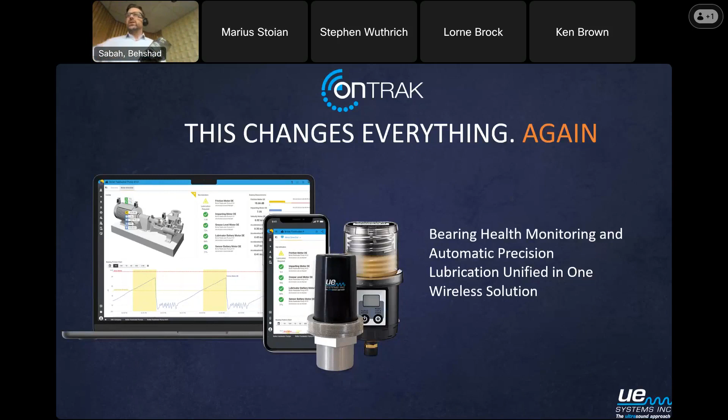So first of all, I always like to start off with a scenario, and I guess my bio was indicative of this, that I've been in this space of a race to detect a problem with an asset or a piece of equipment, and in particular, rotating equipment. So across all industries, everybody has these pieces of equipment, and that's why we're here, that move in a circle, and we need to keep them properly lubricated.

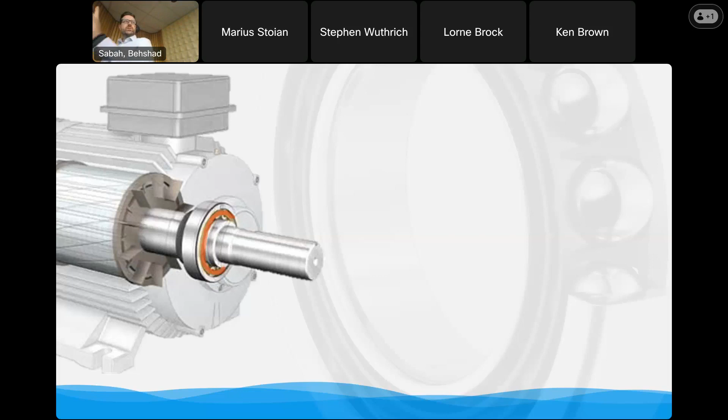And what's happened in the space I'm in around the industrial Internet of Things is it's something I call a race to detect a problem. So what technology can first detect that there's something going wrong with a piece of equipment, which is great. And that's this first scenario here, which is this defect detected.

So essentially, when you look at an alert like this, now I made this alert up, this is in my language, but essentially, as we talk about bearings in particular, there's something wrong with them. Something's already happened by the time technology picks it up.

And if anyone goes back to the late 1960s, there's two gentlemen named Nolan and Heap that started RCM, Reliability Centered Maintenance, and they did a study on the airline industry. And they identified what's called the P to F curve. P is when there's an identifiable physical condition, and F is when there's a functional failure. So that identifiable condition is something that has already gone wrong in a bearing.

The other scenario that we're really working towards, and we believe in that old adage of an ounce of prevention is worth a pound of cure.

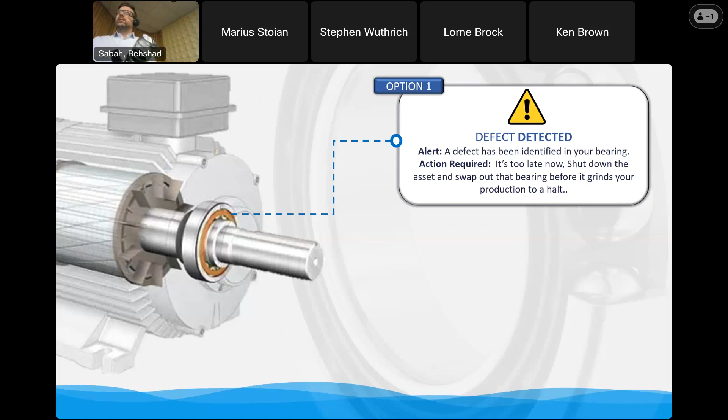There is value in stopping that defect from happening in the first place. So there's really two types of alerts we're trying to focus on here. One is there's a defect detected, but if we take a little bit of the investment we're spending on detecting a failure and put it toward lubrication, I'll get to why lubrication is so important. I know I'm preaching to the choir, but if you have the ability to prevent that failure from happening in the first place, don't you think that would be a better place to put technology? That's what we're going after, and it's a very unique insight we're trying to offer here. In fact, when I ask people, would you rather have option 1 or option 2 for an alert, the right answer is I want both.

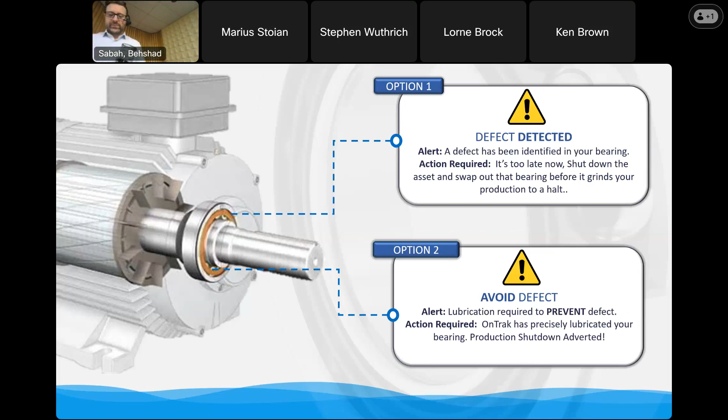So when we go back to that Nolan Heaps curve, and I guess for those in the room, I can't see those online, has anyone had any education around reliability centered maintenance before? This might not be anyone that's in our field, but UE Systems understands we've always been told you cannot have a presentation unless you have a P-F curve in it.

And where ultrasound fits, undeniably - it was actually a study done by NASA looking at bearing defects and the technology that could first detect the first incipient fault within a bearing. Ultrasound, or acoustic emission as it's otherwise known, was the first technology to pick up a defect. Over the years and decades, where it really came into fruition was not only detecting that issue, but moving back before there was an issue to where we could see a problem with lubrication.

So we could literally hear and measure the ultrasound emissions that are leading to that bearing needing lubrication, or of course it failing. This is before - and I'm talking specifically from a bearing aspect point of view - before vibration, before there's a change in temperature, and of course before you can hear, smell, and sometimes even taste it. So when we're looking at ultrasound, we're looking at detecting that failure, but we're also looking at those very, very subtle signs that there's something in that bearing, that bearing needs a little bit of care from us.

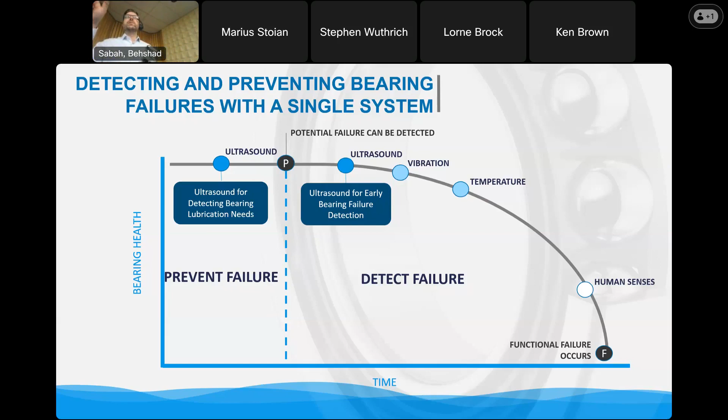I keep on wanting to hit the other button here. This was an SKF study, and I heard you guys talking about going through SKF - it was a great study. Timken and all the bearing manufacturers and third parties have similar studies.

Now it does vary between 60 to 80%, and what I'm talking about here is rolling element bearings, so we're talking about grease lubricated bearings. Up to 80% of premature bearing failures can be traced back to a problem with lubrication. Now the reality is, in the industry I come from, it's all throughout all manufacturing, all industries. It doesn't matter if that's 60% or 80% still.

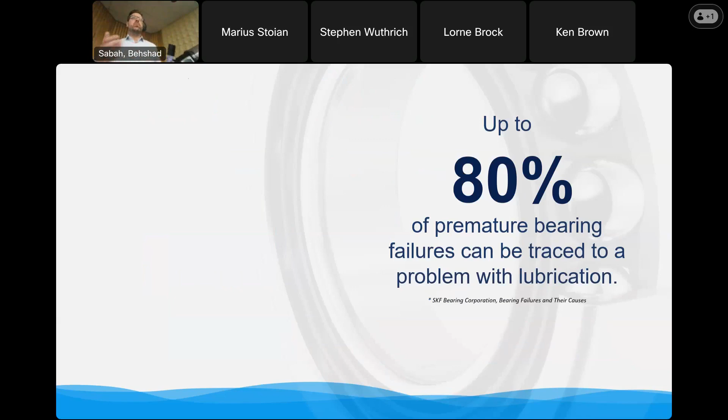The reason why I believe this society exists is we know that lubrication has an important piece to keeping our assets going. But if you look at that study and dive a little bit deeper into how they quantified that 80%, I don't know if I can move this around so those in the audience can see it, but it's not just the right amount of grease.

Let me move it. There we go. So it's about not renewing it in a significant amount of time. You still have the grease properties in there, but chances are the oil's gone, the thickener's gone, things like that. One of the big things we see in our industry is just the wrong grease being used. It's still very, very common to see an electric motor have the same grease as whatever asset it's driving - a pump, a fan. And most of us, I think, know that that's probably not the right choice in that application.

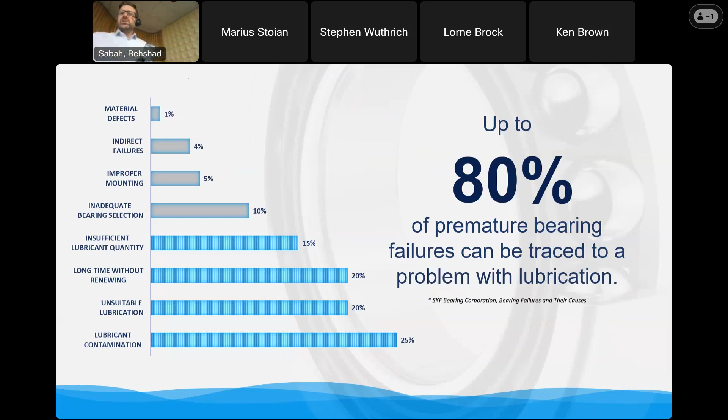Fast forward a few decades, and we got really good at using a calendar and a calculator. I'm sure some of you have seen the calculator to calculate the quantity and regreasing frequency, right? There's a number of calculators out there, and if you look at them, they sometimes get you into the ballpark, sometimes into the right application. But if you look at those calculations, there's a number of variables you have to guess, sometimes more of an educated guess.

As we are here in Canada, if you use that calculator and you have an asset out on the roof or outside, ambient temperature is one of those variables. So if you change that temperature - last week it was 30 degrees, this week unfortunately it's not - if you change that differential of 20 degrees in the calculator, it's going to give you two very different numbers. But how often do you see people using that calculator based on operating conditions? Very little.

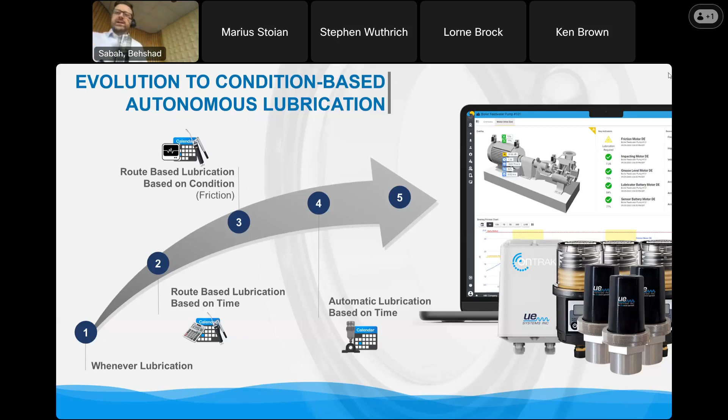As I talk about this, there's really 4 main parts. We have our sensor here, which is monitoring the friction in the bearing. It's also measuring vibration and temperature for an overall asset health of that bearing. Then we have our single point lubricator, called the BTUE - a Bluetooth lubricator - which, if you had the app, you could make go off if you knew the password and how it was encrypted. And we have our software platform that ties everything together.

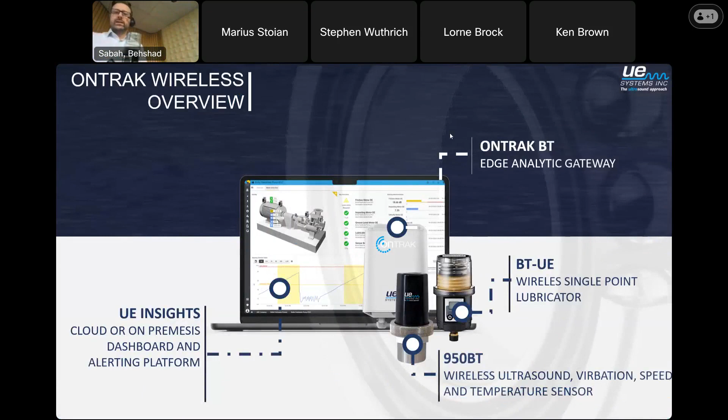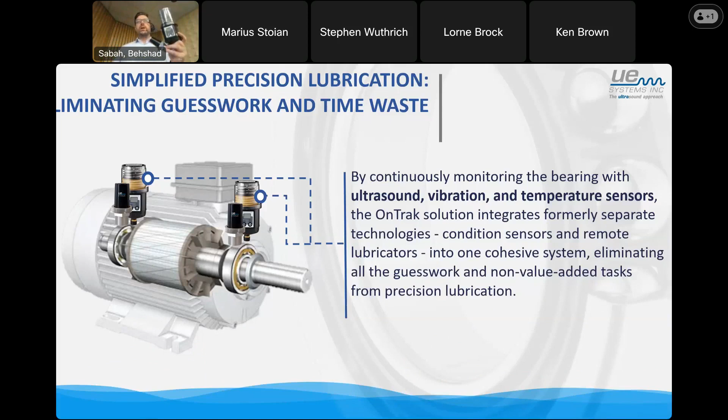Essentially what we're doing is trying to eliminate the guesswork from lubrication. We're combining ultrasound, vibration, and temperature to form a solution that was formerly siloed - you had the single point lubricator and typically a separate vibration monitoring system. We've combined them both into one solution with the goal of removing the guesswork, but also monitoring the health of our bearings past a lubrication failure mode.

So when we look at that sensor, it's an ultrasound-first sensor. I'm going to play some audio - hopefully I can play it on this, we'll try, and if it doesn't work I'll do my best to reenact the noise. Then we have the vibration sensor. We have audio on demand, which means this sensor could be in Australia right now, and through the platform you could actually physically listen to that bearing. And why do we do that?

Because there's still human expertise that's required in all systems. I have an extensive background in artificial intelligence, and I do feel there's a place for it, but it's going to be complementing experts and humans in the loop versus replacing them. We wanted the ability for humans to listen to that bearing no matter where they were, and temperature. If your temperature is going up in that bearing, there are other things that should have been caught before then, right? But it is our last ditch effort to catch a failure.

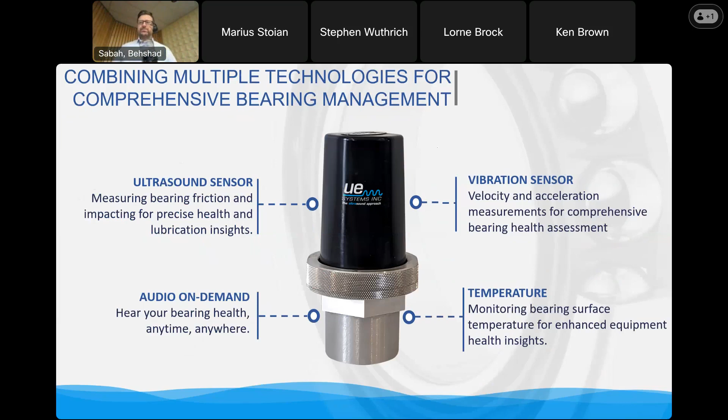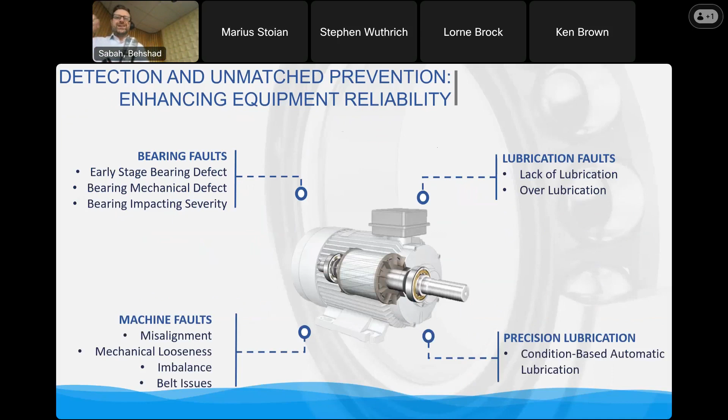With the capabilities of ultrasound, vibration, and temperature, what type of failure modes can we focus on? If you look at the bearing faults, the machine faults, those are caught once an issue is already detected. What we're trying to focus on and put a lot of weight on is those faults to the right: lack of lubrication, over lubrication. I have a Stribeck curve here I need to pull up. We'll go over those, and then of course, precision lubrication.

So this is what that data looks like, and it looks like a lot of squiggly lines. Now if you're an engineer, you're going to understand or love these squiggly lines. What we tried to do—and we can show you what this looks like live if we have time—is we're trying to build insights out of data.

Everyone says in the world of Industry 4.0 or AI that data is the new gold. I don't believe it is. Data is the fuel for it—it's the iron ore, if you will, if you're in mining. But really, insights is the goal we're looking for. So we try to make it: is this misalignment? Does it need lubrication? If it does need lubrication, how much grease does it need? Those are the fundamental questions we're trying to ask.

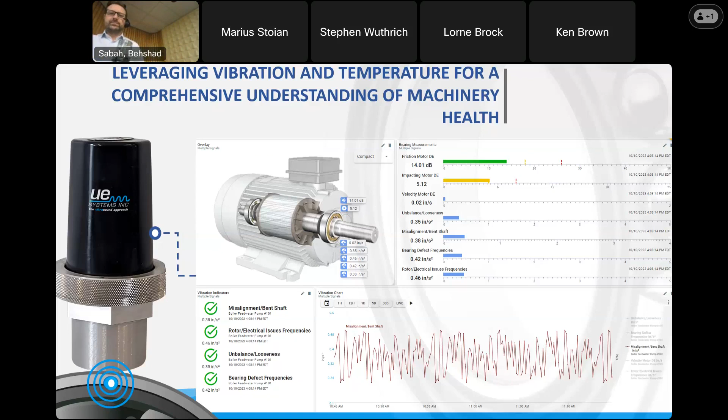Now I know I'm preaching to the choir here on the Stribeck curve. I'm assuming most people have seen it. Essentially what we're doing with this sensor is we're measuring, we're quantifying where we are on this Stribeck curve. I'm going to show you how we're doing that.

I'm trying to take the sensor off. So when this sensor is mounted on a bearing, we're measuring ultrasound, which is directly proportional to the friction level in that bearing. The more friction, the more acoustic energy it produces, and it's measured in a decibel scale. That decibel scale is logarithmic, and I'm going to prove this theory out to you guys.

I know I'm preaching to the choir here about the boundary. The boundary, the way I like to describe it, it's metal to metal—there's no lubricant in there. It's the highest friction we could ever get in that bearing. Even when a bearing completely fails and the rolling elements are on the floor, the friction actually goes down because there's nothing rubbing, it's just floating in air. Now the other side of that bearing's taking a heck of a load. So there's the boundary, we have the mixed, and we have the hydrodynamic.

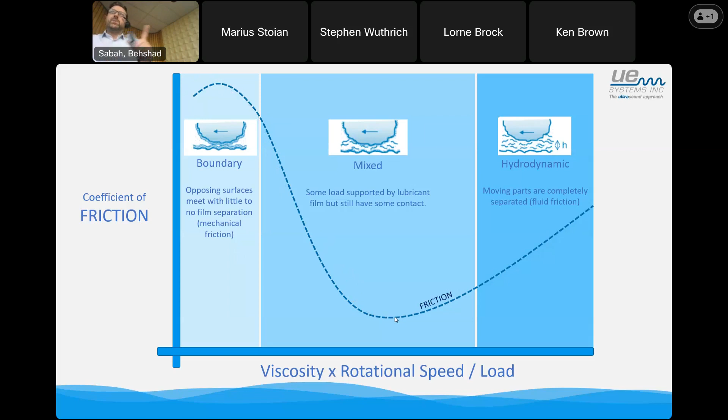Here's the interesting part. As we're going through this—and I'm assuming you can see my mouse—as we go through this, right, we're adding grease, we're dropping that friction, we get to this point. If we keep on adding grease, what happens? That friction goes back up, right? So if you look at this—and this is the best I could draw the Stribeck curve in PowerPoint, so it's not the correct slope, but you get the picture—that's film thickness, or how much grease we have in that bearing. So if you draw a straight line across that, and say we just walked up to a bearing and put this sensor on, how do I know if I'm at this point of the Stribeck curve, or I'm at this point?

And I got all day. I'll sit here and wait because I still got about 30 minutes left on my clock. How do you think we would know where we were?

I know it's late in the day. We all ate, so I'll give.

What was the answer? So the noise level, which is indicative of the friction, is at the exact same level. We just don't know if we need to add more grease or we've already added too much.

So I'm going to walk you through a scenario. Say I'm right here, and I go up with the grease gun and add just a little more grease, what's going to happen? The friction is going to go down. Okay, so keep that in mind. Scenario two, if I am here and I add more grease, what's going to happen? The friction goes up. So the way we do this, people think it's magical and scientific, but that's what we do when we have this system out there and we don't know where we're at.

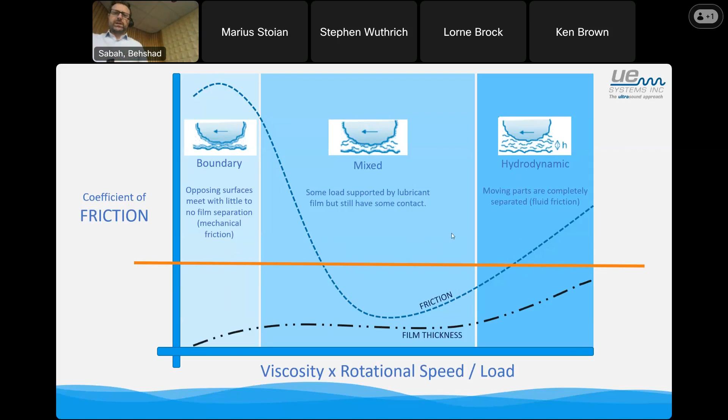Okay, this doesn't require sound. So what we're doing, and the picture in the image, I want you to picture even if this was an audio sound, you were playing it on Spotify, what that would sound like, the magnitude. And the minute grease hits, that's that sound going down, that's that friction level going down.

Next slide, I'm going to play some sound clips, hopefully it plays. If not, I'm happy to send it out after the fact or direct you to our website where we have tons of samples. What we're going to look at is an ultra probe. This sensor is listening to that bearing, and what you're going to see on the screen is a decibel level that is directly proportional to the friction.

As the person in the background is adding grease, I want you to watch that friction level on that screen start to drop. Go back to when I had that Stribeck curve up, because this person does a few things wrong when it comes to lubrication best practices. But the intent is to show you how it works. If you want to comment on the lubrication practices, that would be good too.

Okay, so we started off around 58 decibels. He's pumping a lot of grease into that bearing. Now, if there was audio, you would actually hear it, but that's fine.

What's starting to happen here? It's going down. Whoa, did that drop? An 8 decibel change is doubling, or either doubling in either direction, the friction level. An 8 decibel change.

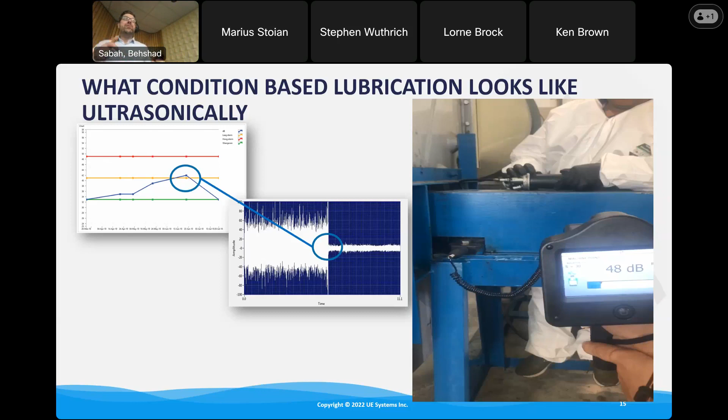So that's how it works. Let's take a little deeper dive into this. Let me see if this will actually work... No, I guess there's nowhere to play sound. I'll send these out after, let me just make sure... yeah, there's no way of playing it.

Maybe you heard it on the call, but essentially this is a sound you would hear when you lubricate that bearing. As you're lubricating it, it's going to be very loud, a lot of impacting, a lot of noise. Some people describe it as gravel, like you have gravel in a can and you're shaking it around. That's what an unlubricated bearing sounds like.

And you'd hear that as you're applying grease, you'd hear it go 'shh.' We call it the aha moment, because you don't need to be a tribologist or an expert to understand that dampening of the sound is what you're looking for.

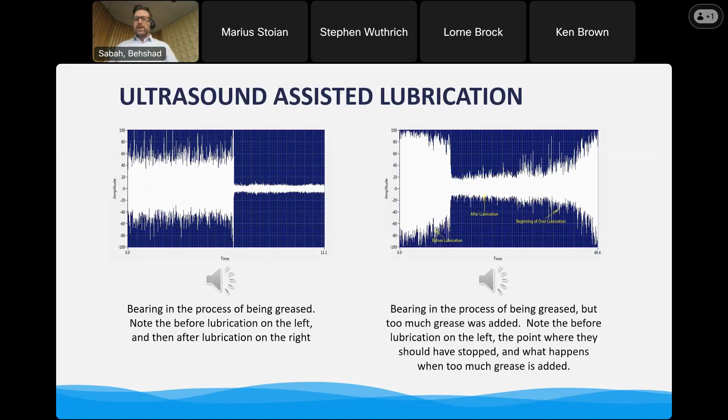This was an example of that bearing being lubricated, and this is exactly what happened in that previous video. They dropped it down, and guess what? They kept on lubricating. So you see it drop, and you see that sound come back up again.

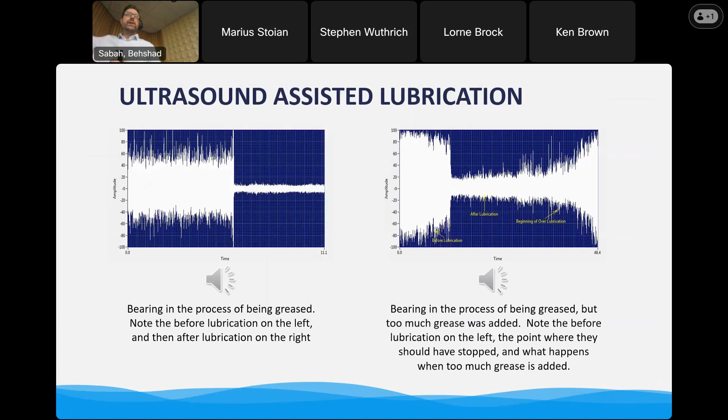This is what the platform looks like. So when you're looking at it live, this is what the gamification looks like. We have that friction level go up.

The way we determine when a bearing needs lubrication, a lot of people think we're throwing a dart at the wall, like, try here and see if it works. There is an ISO standard. I can never remember the whole name of it, there's a bunch of numbers after ISO, and it's not the greatest read, but it does outline the limits for any bearing subject to change, subject to slow speed or very high speed.

Slow speed is less than 100 RPM, high speed is once you get over around 10,000 RPM. Those limits do fall off, but there's an ISO limit that says 8 decibels of friction change over your baseline, over what the friction level normally is, is the first indication it needs lubrication.

So an 8 decibel change, a 16 decibel change indicates you're beyond lubrication failure mode, and a 35 decibel change means that piece of equipment is walking down the hallway. It's gone. I've seen it a few times, but we don't like to see it much.

I'm going to tell you why that's important. If you look at this blue line, grease is added, and it starts to go down. We call it that aha moment, because when you're remotely monitoring your bearings and you say, okay, go ahead and lubricate, or it does it for you, and you're watching that friction and watching that drop, it's a pretty amazing thing. So we start off with those ISO standards, and we'll fine tune it based on the application.

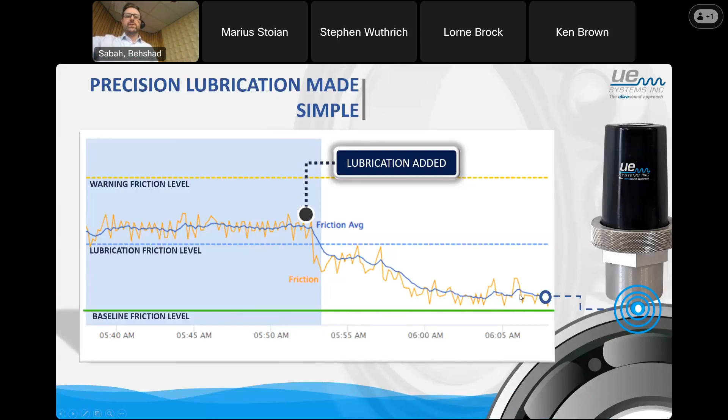So when we look at how the sensor works, and again, I'll hold it up to the screen here, technology in the IoT space has really changed the game. How far we've seen it in the consumer business with our headphones and things like that. They're constantly improving how crystal clear sound can be when you put in your Bose or, I'm not an Apple guy, whatever those things are called, those white things you put in your ears.

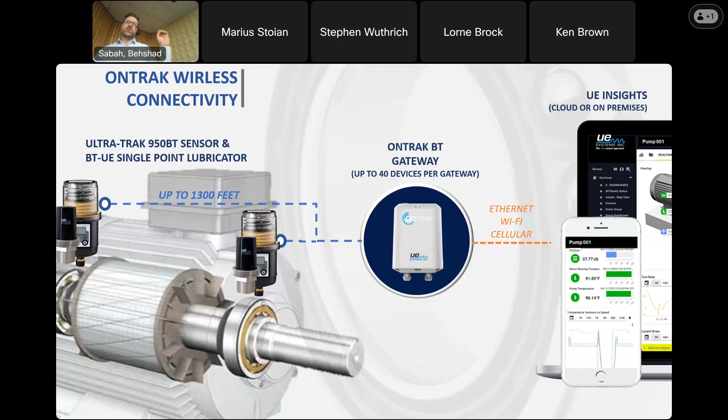But the range at which they've been able to communicate now, with the right gateway, we can get up to 1,300 feet from the sensor to a gateway, and we can talk to up to 40 of these devices. So you start to think about your assets throughout a plant. One gateway can cover a lot of assets, and all that information is meant to, whether you're a regulated utility or whether you're making cookies, there has to be different ways of getting that information out securely into platforms, and that's what we've built here.

So again, I've talked about this at the start, what we're trying to do is really give you a holistic view of the health and lubrication needs of your asset, and really transform that data into insights, and also guide people. So when you do have an issue that you can't solve with lubrication, what is likely the issue? Is it a bearing defect? Is there a loose belt? Is there misalignment? Is there a coupling issue? Things like that.

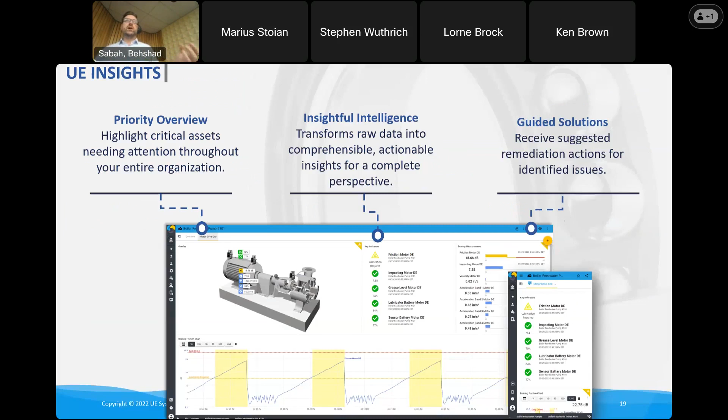So we've had a wired version of this product out for 2 years, well, 2.5 technically. And what was interesting is, best way to explain this: we've known, because of our handheld instruments using ultrasound-based lubrication, the grease savings that are possible. When we developed this system, what we found, to my surprise, was we were lubricating bearings more frequently than we were catching with the traditional 1 month route-based inspection.

So we would see a typical pillow block bearing ask for grease maybe once a week. And the whole premise, the whole company, was built on the idea that with ultrasound guided lubrication, you're not going to use as much grease. I thought to myself, could we be doing this wrong? And what we came to learn was that in order to maintain the ideal friction in the bearing based on that Stribeck curve, it requires grease more frequently.

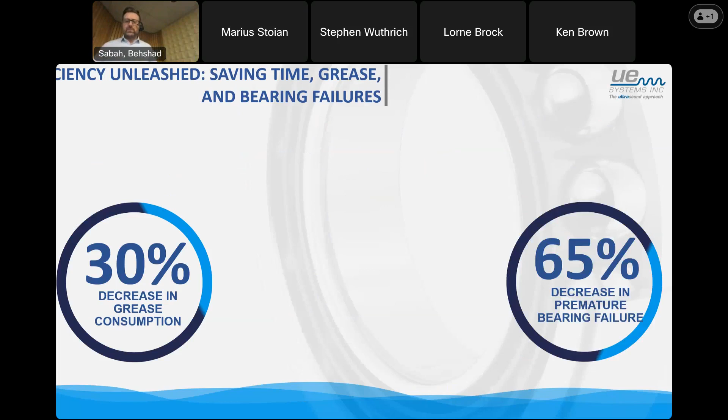But significantly less, so the math worked out. Instead of going around and putting 10 grams of grease into this bearing every month, when you went around monthly and did it, it would only take 0.3 cc's every week to keep it happy. So while it was putting more grease in, more frequently, the quantity was significantly less. If you think about it, because you're constantly monitoring that Stribeck curve, oh, I need a little bit of grease, you're constantly drip feeding it based on condition.

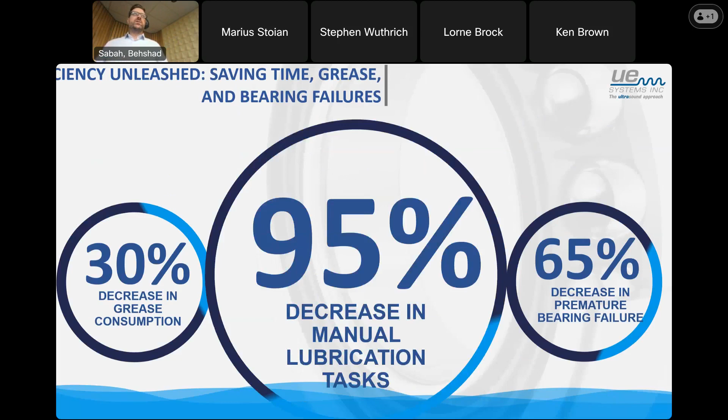And our whole goal of this system was to put it out there and save bearings. But that still wasn't the biggest benefit that our customers came back and told us. What did they tell us? Just the time savings of people going around there. And you guys would know this: how many lubricated assets are there in a facility? More than one, less than a gazillion, right? There's a lot. So that time saving seemed to be the biggest driver.

And one of the things that we came up with is we learned, through over 2 billion data points that we analyzed, that there's really two variables that are most indicative of the lubrication needs of that bearing.

It also tells you how much lubrication is required. And what we found is the value of measuring just the impacting—how many spikes you have when you're looking at that time series data—is a very good indication.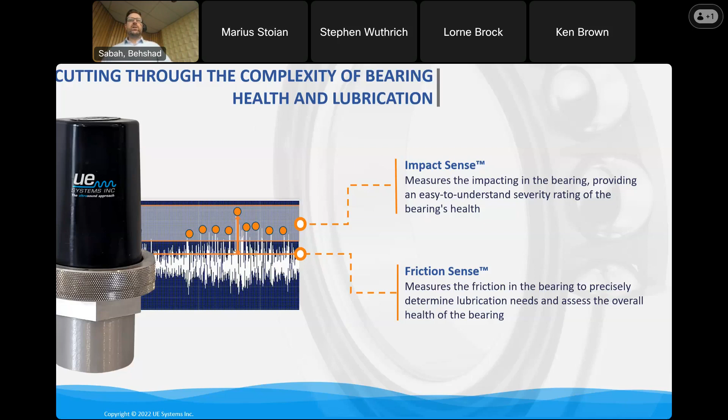That's a very good indication of early signs that a bearing needs lubrication, but more importantly, the severity of which it's failing. And I'll go through some case studies here at the end—I'll say this repeatedly—lubrication can mask a failure, but once a failure is already there, you cannot stop it from happening.

Let's take a look at a bearing that's lubricated but has severe issues. So we saw that same level of friction, the same level of impacting, but even after lubricating, that friction did go down. But look at the number of spikes, or impacting, that's in that bearing.

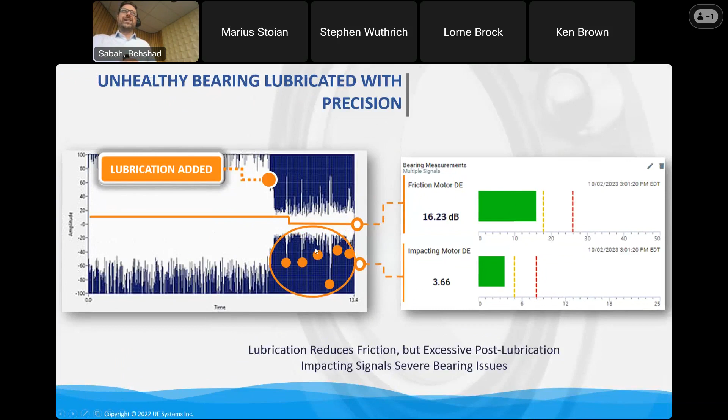So would you rather have this bearing or this bearing? Right? Yeah, that's right—you'd want this one. You want to control the friction and the impacting, and that's going to guarantee saving a lot of life into that bearing.

And then there's the ability—again, we can't have sound here, but I will send those recordings—the ability to take the sound file and analyze it, so you can look at whether it's an inner race defect or an outer race defect.

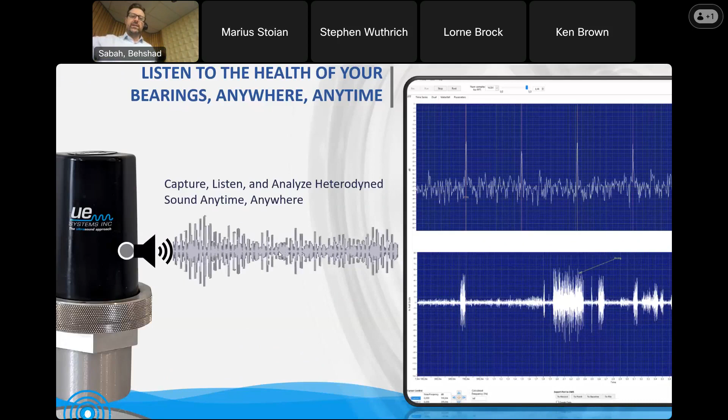And then as we tied the system together—for those of you on the call who've used these single point lubricators, you'll know exactly what I'm talking about—these single point lubricators have been put out there in the hundreds of thousands, if not millions, across factory floors and plants, and really just in Ontario.

These sit out autonomously. They're installed on bearings, and as I said, they sit out there all day, all night—sometimes indoors, sometimes outdoors.

And we asked our customers, do you use them? And if you do, do you like them? And they said, we use them, we don't like them. They either said we use them because we have to...

...or, I've used them, they're in the garbage, you can go get them, right? And the reason is they build a lot of trust, but if they go wrong, they go wrong. You might not get back to it for a month, another two months, and it's not lubricating your bearings.

And your equipment fails. So what we wanted to do was build something smart—so from anywhere, through your cell phone, if the grease level gets low, it's going to send you an alert. So for any of our customers that have this, I say, if you run out of grease, you've chosen to ignore a bunch of alarms.

Back pressure—so if you think about this, this can get mounted about 20 feet away from the bearing. So you can bring it outside of an unsafe area with guarding and things like that, and mount it 20 feet away, and it will push grease at 850 PSI into that bearing. But what can happen with 20 feet of line?

It can get cut, it can get plugged. So we built a back pressure feature in there. It's self-serving—one, to your point about blowing out the seals, it will prevent you from blowing the seals out, right? It's not a human doing it like we saw. But number two, it's also going to try to save itself, because we don't want to keep replacing these.

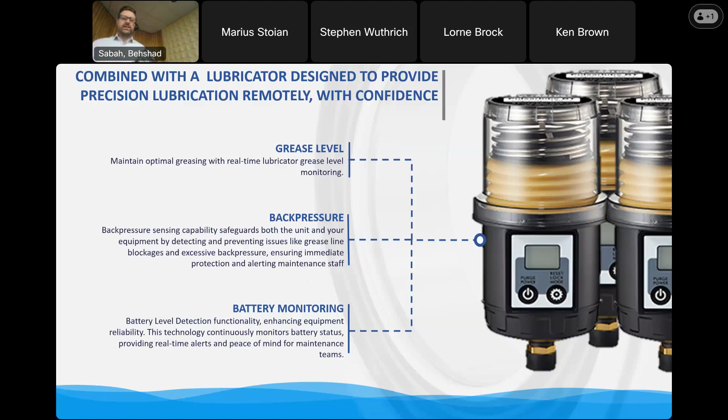So it will stop and say, hey, too much back pressure detected. And of course, it is battery powered. If it's sitting out there, we're going to monitor the level in that battery.

One thing as you're looking at new age IoT or Industry 4.0 platforms, especially as you get to regulated bodies with NERC, OPG, nuclear plants, is you can't just have data going every which way. That's what's happened, everyone's built solutions on silos. If you want to use ours, you have to use our data, let's go to our cloud. We're trying to build enterprise level systems. So if you want it in our cloud, great. You want it in your cloud, a big conglomerate company has their own cloud, great. You want to keep it on premises where it never leaves that plant, proverbially the four walls, great. You have options.

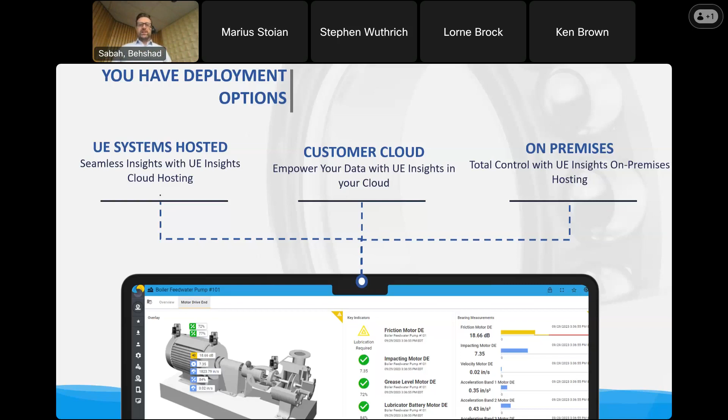On this pillow block bearing, you see it's belt driven. This is our wired version I'm going to show you here. You can see the sensor that's monitoring that friction, just like I showed you where that guy was using a handheld unit, it's doing the same thing, except you can't see a number, only if you have the platform up. It has an accelerometer, that's not ours. There's a vibration sensor on the strut that shouldn't be there, it likely fell off somewhere. And that copper tube line is the grease line coming in.

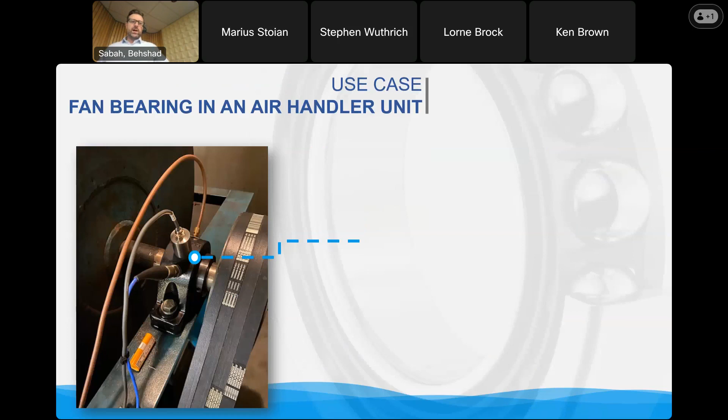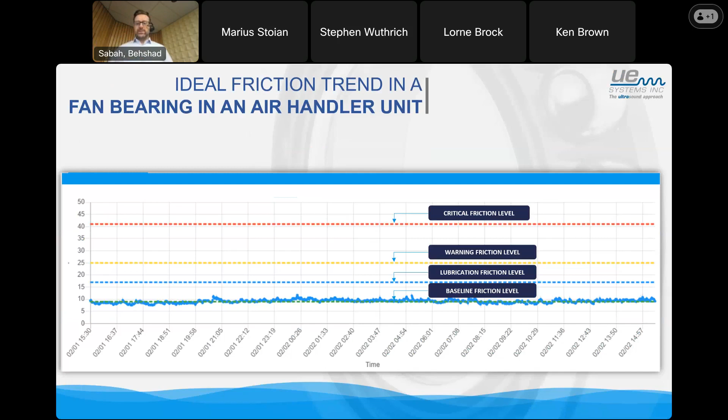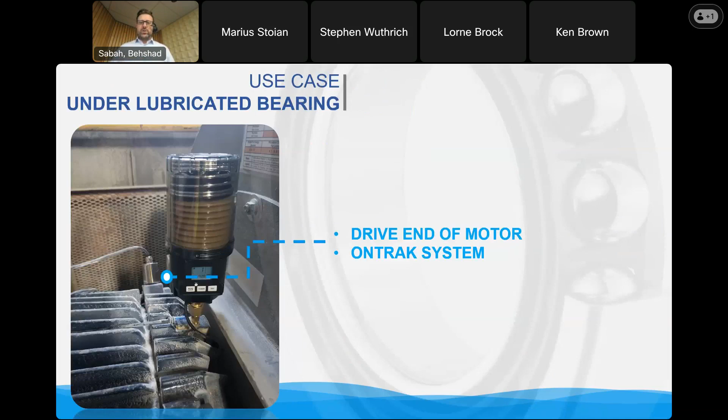So here we are, this is driving a big fan. The sensor's in the background, the wired version, the single point lubricator's up front. It's the drive end of a motor. I'll walk us through this.

You can go through and say, I want to SmartLube it, or manual lubricate it, which means you push the button, a known quantity of grease is going to come in. If you use the assist mode, it's going to do all the logic for you, constantly monitoring that Stribeck curve. If it ever sees that friction start to go up, it's going to stop automatically. If you ever reach the maximum capacity of that bearing, it's automatically going to stop. So there's safeguards in place.

And the second option, if you get the alert, you can put it in fully automatic. We always recommend not doing that for the first little bit until the system gets to learn your bearings, and then it will lubricate on your behalf.

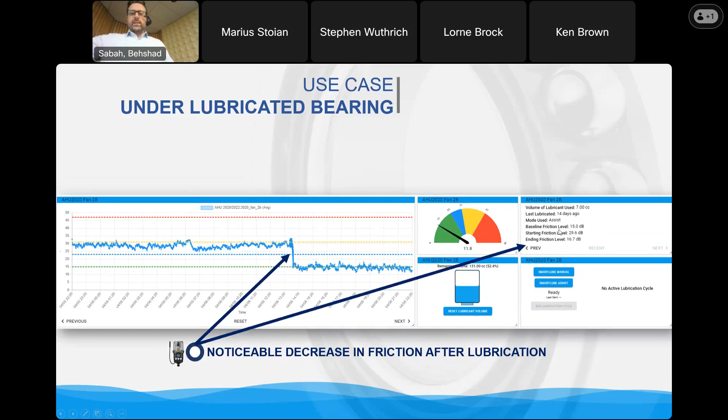Now, this was a study done by a laboratory in the States, in Pennsylvania. And when I was talking to him, it happened to be at a conference, a lubrication conference. He came up to me and introduced himself and said, I love what you guys are doing. If you guys know EPRI, which I'm sure you do, he did a study for EPRI around using acoustic monitoring and lubrication. He said, I'm happy to share the paper with you.

So they proved that with the right technology, you could do this. And I was just going through those billions of data points I was talking about, and an image like this came up, and he said, do you know what's happening when you see these spikes here? I looked him dead in the eye and said, absolutely, and I had no clue. I said, well, why don't you tell me what it is? And he brought me to his lab, he had an open bearing, put plexiglass over so the grease would stay in, and used different dyes in the bearing.

And he was able to starve a bearing. And what we saw was these little explosions, you probably saw it in your grease lab too, these little explosions pulling from pockets of grease throughout the whole bearing when it was starving for grease. These little micro explosions, it looked like Disney fireworks, if you would. And that's exactly what's happening.

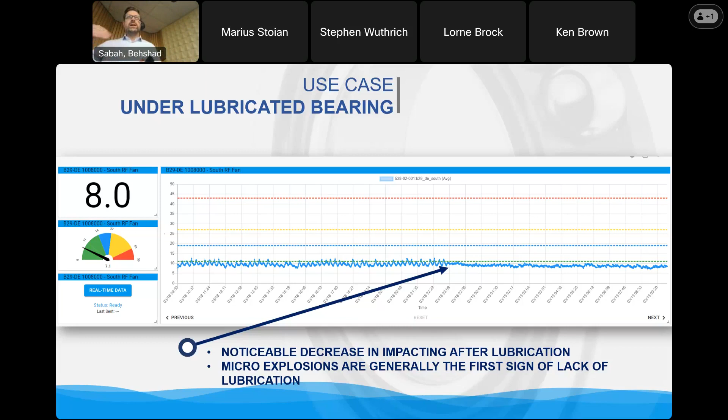So we can pick up these little subtle impulses, this impacting that's happening. And what we did is we walked up with the grease gun, not a DeWalt battery powered one, but the manual grease gun, just shoved a little bit of grease in there, and it just smoothed right out. So that gives you the power of how sensitive these sensors are.

Now, so those were all, except for the last one, marketing pictures. Those are what you'll see on our website of everything being rosy and working just perfect. But what happens if you lubricate a bearing and that's bad? I travel throughout North America and the world telling this story, and people in a northern climate get it right away. So the analogy I give is: picture the 401, picture the Don Valley parking lot, whatever it is, and think about it from the perspective of a pothole.

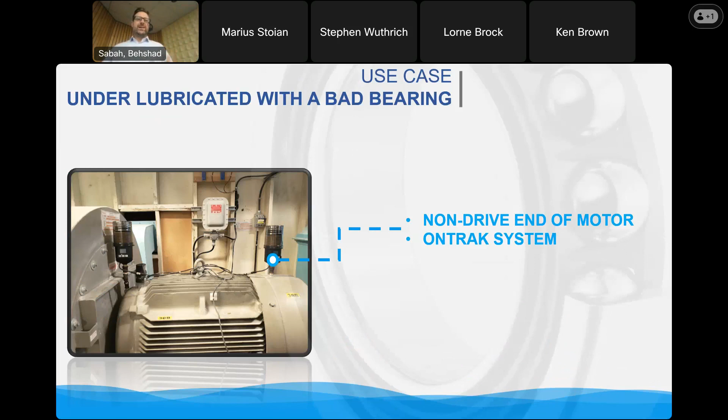So if you have a pothole, the city will come in eventually and fill the pothole. Then your friction level's better with a car driving over it, but each car that goes over it, what happens? You dig a little bit of that pothole up again. And that's what we've seen time and time again from a lubrication point of view on a bad bearing.

So you can see here the friction level went up, it's supposed to be at this green line, it went above the blue, hit the yellow. The system lubricated, dropped it down. Looks like it was good, right? We filled the pothole. But what happened to those rolling elements? They kept on going over and over and over it.

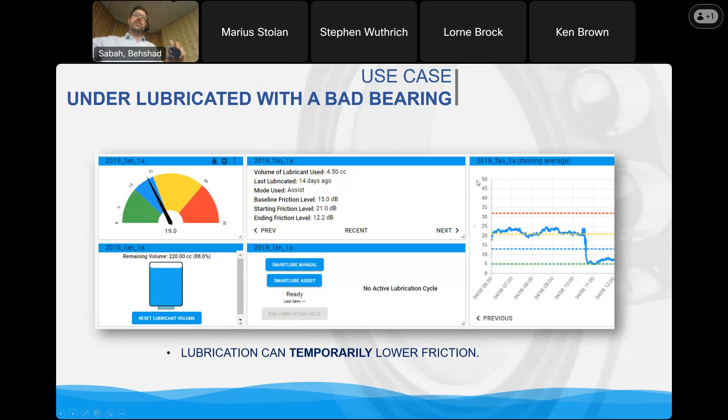So if you remember earlier, about 2.5 hours ago when I started this presentation, I said lubrication can mask a failure. It can't cure it. Right? It's too late now.

So what's happening here is that friction went down, but as those rolling elements started to go over it and over it and over it, what happens? The friction level went back up. The rate at which it went back up tells us a lot about the severity of the issue in the bearing as well.

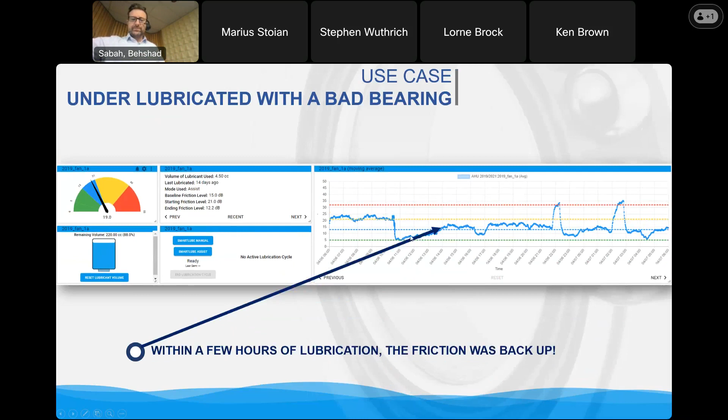So to prove this out, if you look at this, this was this year, around April 6th, we lubricated it. This next one was April 20th, so 14 days later, lubricated it again. Look how quick that friction came back. Good indication that bearing is not healthy.

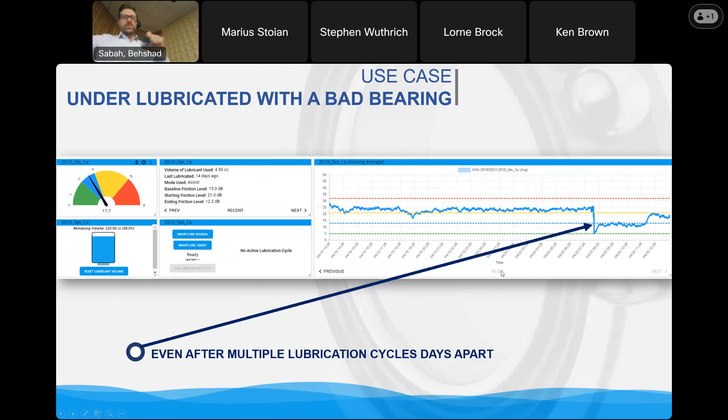So that's why we have the manual button on the platform, on the OnTrak. Why? Because we have seen customers sacrifice grease to get through the next shutdown. They nurse this bearing till they get to Sunday when they're going to shut down, at the cost of grease, at the cost of the environment. They're going to keep on putting grease into that bearing, into that bearing, into that bearing to save it.

That was fantastic, we have a last question. Is there any mobile equipment, off-road equipment, drills, anything you've tested this on? We've been on anything that's moving - excavators, autonomous trucks, CAT 793s, 797s. I'd have to check with our mining guy, I'm sure he's probably strapped into it somewhere, but nothing else I can think of. Okay, alright, thank you very much. Thank you.